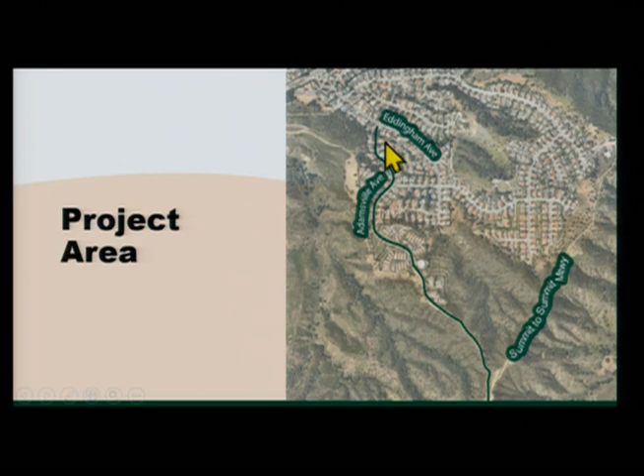It starts in a residential area and then it ends in a fairly open space area. The community has voiced some concerns about speeding. In the northbound direction, there is a decline, so people tend to speed. It is downhill as you come here and then extends into this community, so there's concerns about speeding.

A couple different facts about this area and the existing conditions - Tatiana had mentioned some of them. It's a two-way winding road with on-street parking, a 25 miles per hour speed limit, and it primarily runs through a residential area. There's a steep grade, and the area experiences downhill speeding.

So we looked at several different options and wanted to get your thoughts about these different options. We'll provide some recommendations and what we think towards the end, but we considered several different options and some of the considerations that come with those options.

The first thing that we looked at are speed legends. A couple different things with speed legends to think about: they're painted numerals on the roadway, they indicate legal speed limits, they catch drivers' attention, and then they influence reduction in vehicle speeds. One other thing that's helpful with these is in areas where there might be limited visibility - where you can't see a sign, you're coming around a curve, or maybe you have vegetation - they can also help reinforce the speed limit.

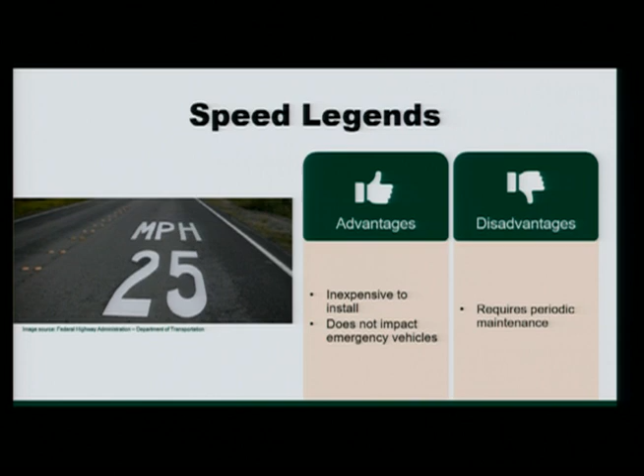Now, we wanted to consider some of the advantages and disadvantages of each of the options that we looked at. Some advantages of speed legends: they're inexpensive to install, and they do not impact emergency vehicles, which we know is very important in this area. Disadvantages: they do require periodic maintenance, so there will be some maintenance involved. I should also mention that all these different options we looked at are relatively low-cost treatments, so we're looking at something that we can fairly easily implement - you'll see that with all of these different options.

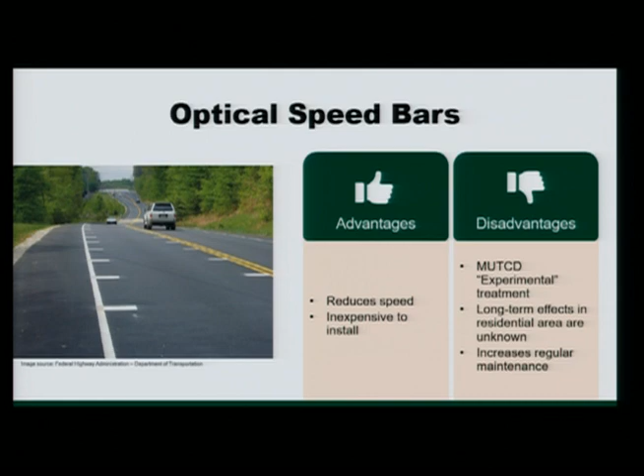The second option is optical speed bars. These are effective on curved roads - they're painted stripes across the roadway, spaced at gradually decreasing distances to give a perception of speed, causing the driver to slow down. Some advantages: they reduce speeds and are inexpensive to install. Some disadvantages: they're considered experimental treatments with the MUTCD, the long-term effects in residential areas are unknown, and this does increase regular maintenance needed.

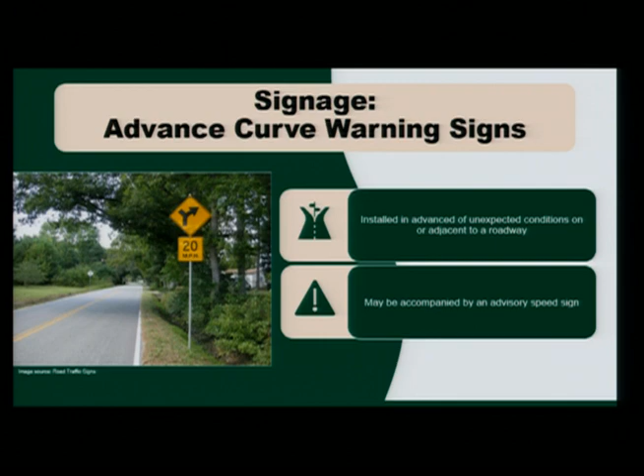The other signage we looked at are advanced curve warning signs. These are installed in advance of unexpected conditions on a roadway, and they may be accompanied by an advisory speed sign. The advantages are that they provide advanced warning of unexpected or sharp curves, and it is a visual warning. Once again, the disadvantage would be that it may cause confusion or sign pollution, but with these you typically don't have to place as many as the one we showed previously.

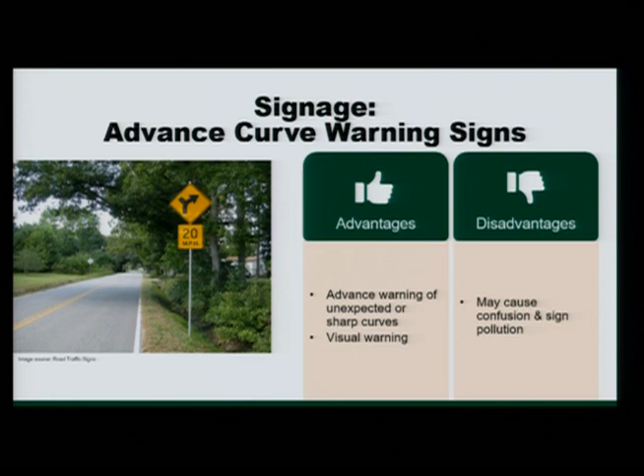So based on what we looked at, some initial recommendations to help speeding in this area would include - and this is what we recommend - speed legends to reinforce the speed limit, advanced curve warning signs to complement that, and some additional strategies that we considered that could help support these would be mobile speed feedback signs to get data on how effective these treatments are, and also enforcement of the area.

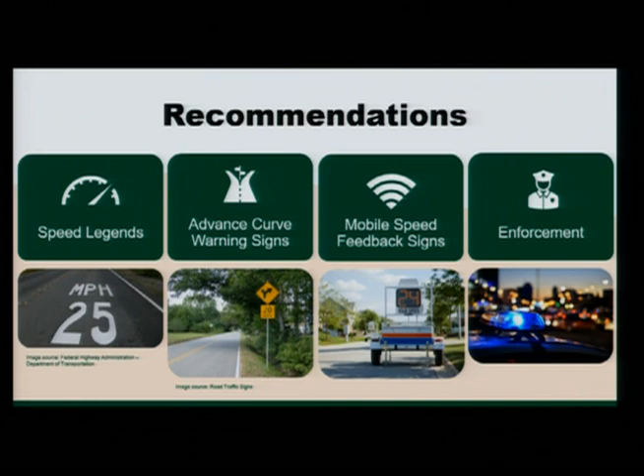And then just some initial locations - I think this is pretty conceptual at this point, but to give you an idea, we could place the curve warning signs in advance of the curve, and then we would also paint the numerals. This could be done in both directions, but based on the way things are geometrically, or the slope of the area, we would really want to focus on the northbound direction over the southbound direction.

And that's all, thank you so much.

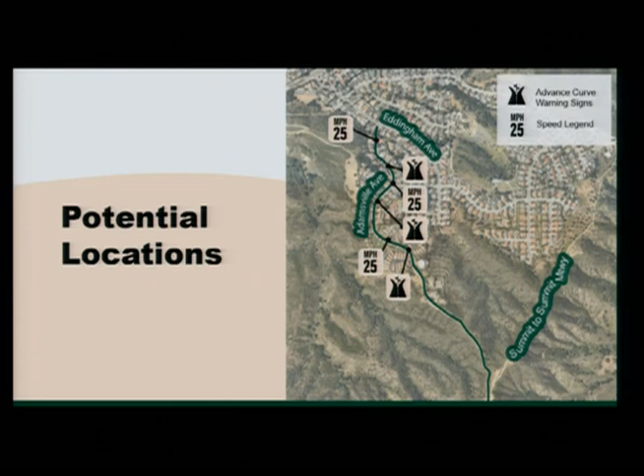Wonderful, thank you, Maya. Let me ask you a question - I think this is more for you, Philip, or the team. But what are we using currently within the city that's more consistent? Is it speed legends and the curvature sign that you mentioned?

Well, I did notice a speed legend leading up to City Hall and a speed feedback sign. I think those are consistent. But let me let the city weigh in.

You're absolutely correct, Maya. We do use speed legends where we notice it might be visible and helpful for drivers to pay attention to the speed limits. In more rural areas, we do use curvature signs with advanced warning signs. We don't use too many chevron signs in the city, but we think that's the additional option that would come after the recommended measures.

Okay, got it, thank you Tatiana. Question - I'm just curious, are there studies that indicate what seems to be most effective in these situations? Because this is a problem not just on Adamsville, it's really bad there because it's a steep hill, but all over the city. I've lived near Parview Drive, where if you're out there after 10 o'clock at night taking a walk, people are just blowing through the stop signs and everything. I'm curious, in your research, does anything show what seems to be most effective in curbing people's bad behavior?

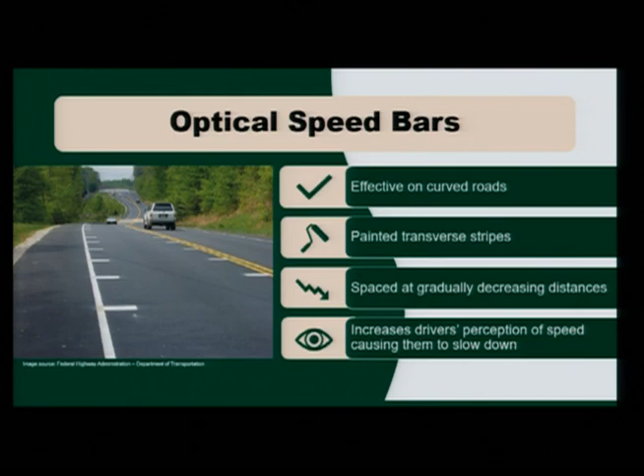The second option you mentioned was the speed bar or something. If I'm not mistaken, you went through that so fast and I don't have a printed copy. So the ones you install on the ground on the side of the roads that go down, what are those called? Optical speed bars. At least this is something physical. When people come down, if they're going too fast, they will notice that and slow down.

That would be my thoughts to share. Thank you. Thank you.

We usually rotate the sign throughout the city. We can leave it in one location for about two weeks, because after that it's not effective anymore. People get used to it, so the strategy is we install it on the same street but in a different location, and bring it back in a few months.

Understood. And we're not talking about a fixed sign, we're talking about a mobile sign, right? Correct. Which you highlighted, right, Maya? Okay good, I got it.

Wonderful. So our call to action then, Tatiana, on this particular agenda item is: what are we looking to achieve with this? Is this something we want to take to council and approach them with, or is this something we'll vote on internally and then move forward on?

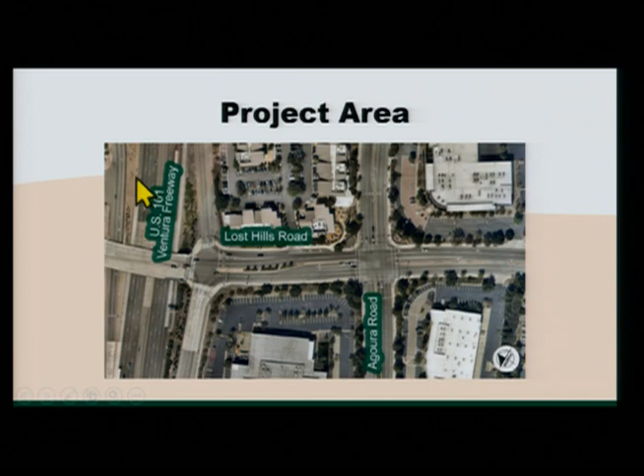Sure, thank you so much, Tatiana, for that great overview. So this is the current conditions of the roadway. Right here is one of the areas she mentioned, and then right in here is another critical intersection. When we're looking at Lost Hills and Agoura Road right now, this is currently a through right turn. I'm going to talk about how we can restripe this corridor to better accommodate the movements.

There is a lot of congestion in this area caused by the nearby freeway, and we think there are a couple different options to improve the conditions here. A few facts about this area: the 101 is quite close to this intersection, creating a lot of congestion, with heavy morning southbound movements and heavy evening northbound movements at Lost Hills and Agoura Road.

There are existing Class 2 bike lanes on Agoura Road and Malibu Hills Road, the west and east directions. It's also important to note that within the city's bicycle master plan, there are future Class 2 bike lanes identified on Lost Hills Road from the US 101 ramps all the way down to Mulholland Highway, where Lost Hills eventually turns into Las Virgenes.

So we came up with a couple different concepts. It's really important to note that while this may look like a design plan, and it is somewhat of a design plan, it is very conceptual—not a construction plan by any means. We wanted to create conceptual plans to get your feedback and see if that's something we want to move forward with.

We have two different options. The first is Concept A. It's important to note the two concepts are exactly the same here, but we changed it slightly here. The black box will remain the same between the two concepts, but you'll see some slight deviations, which I'll highlight in the green box here.

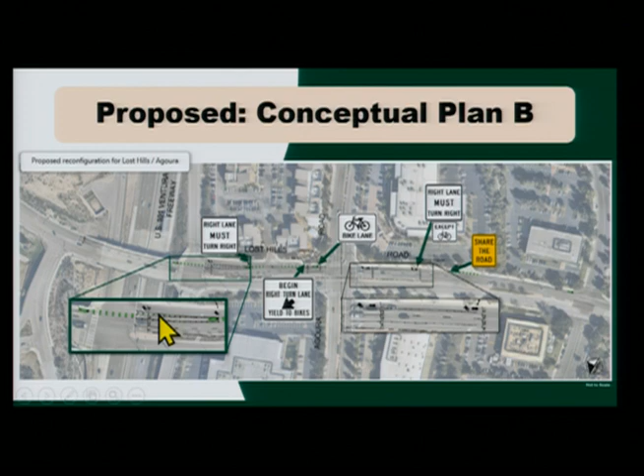At this point, in Concept B, there is a corrected offset, which you can see is a straighter line across the intersection for the cyclist. But this creates a more narrow buffer between the through traffic and the bikes going straight through. The buffer is more emphasized between the right turn pocket and the bike lane. What's important to note is typically when we create a bike lane, we want more of a buffer zone between the through traffic, because typically, yes, go ahead.

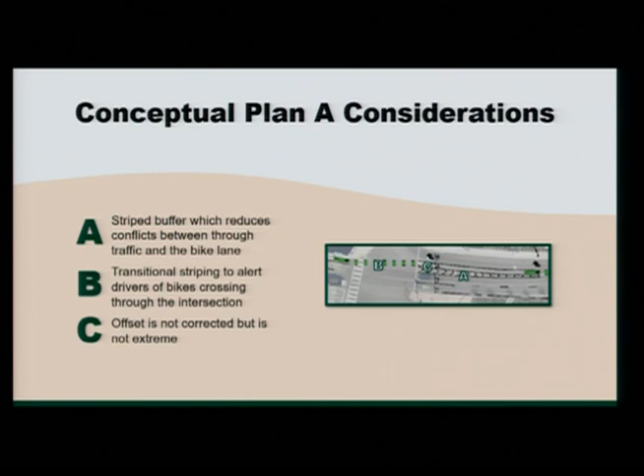You have a question? I'm confused, we're looking at Lost Hills Road, correct? Yes, this is Lost Hills right here. So I guess what I'm confused about is you're referring to it as an east and west segment, shouldn't it be north and south? This is north and south, sorry. Right, yes, but on your next slide, go forward one, it says corrected offset from... oh, I'm sorry, east. It should be north and south. Yes, it should. Okay. And the same thing, let's see. Oh, just there, yeah. So thank you for pointing that out.

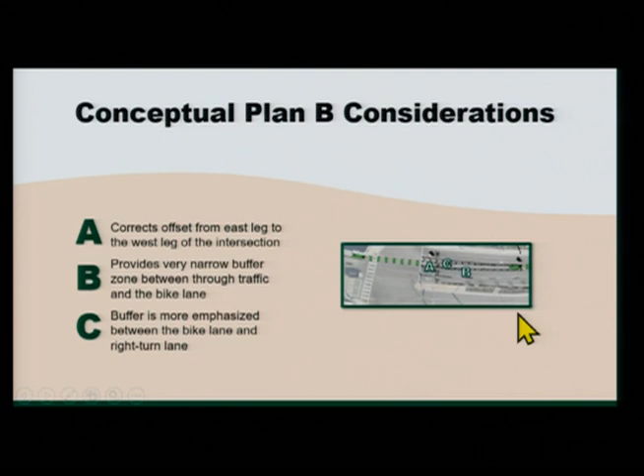So one other thing is the buffer is more emphasized between the bike lane and the right turn pocket, but when looking at bike striping, we want to create a larger buffer between the through traffic, because typically they are moving faster than someone making a right turn.

With this in mind, we believe Concept A is a better option because it creates that larger buffer zone. You still get the benefits of providing facilities for bicycle connectivity, consistent with the bicycle master plan. You create a large buffer zone between the through traffic and cyclists, and include the transitional striping across the intersection to make drivers aware of cyclist presence. The last part, which I think is one of the most important, is it maintains the intent of the improvement project to create a dedicated right turn lane and keep that through lane so we can alleviate congestion in this area.

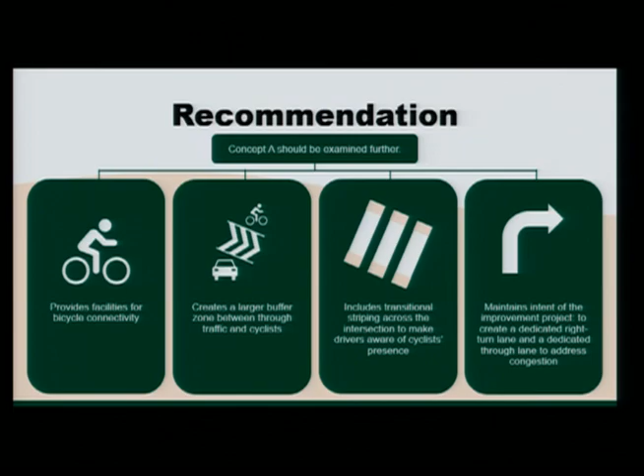That's great, thank you, Maya. Appreciate that. Let me ask you a quick question.

We all know that area is our commercial office area, right? We have a tremendous amount of tenants, Cheesecake Factory over there, a lot of employees, and that's a very heavy pedestrian area. So when they're crossing the street to go over to the food courts or Erewhon or the Summit, wherever they're going, thank you. So right now, if we go with something like this, is that going to solve the pedestrian issue? How do we kind of... or are we still going to have the same problem with traffic congestion in that right-hand turn lane?

No, the pedestrian movements will stay as they are right now. I understand what you're talking about if we allow right turn on red, but that's a very standard intersection with a pedestrian crosswalk and allowed right turn on red. Vehicle drivers need to yield to pedestrians at the intersection, so there still will be that. We'll have to look at the signal timing once we implement the change, because there were certain changes made after the interchange was constructed and that lane eliminated. So that will happen as well. We'll look at the timing to make sure pedestrians have enough time to cross the street. We will have additional signs installed for the pedestrian crosswalk, so the safety of the pedestrian will be taken into consideration.

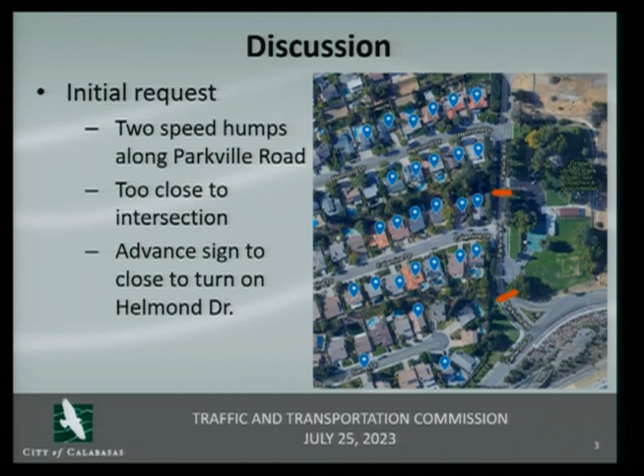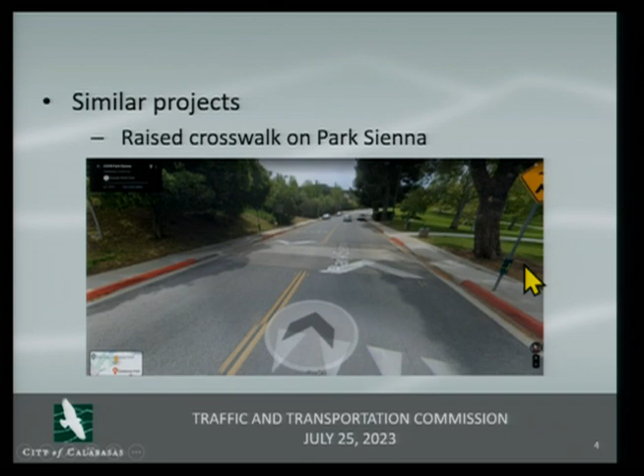So we decided to go with the raised crosswalk, and here's one example on Park Sienna - this is an older picture, but right now it's striped and has the continental striping on top of it, and people are quite satisfied using it.

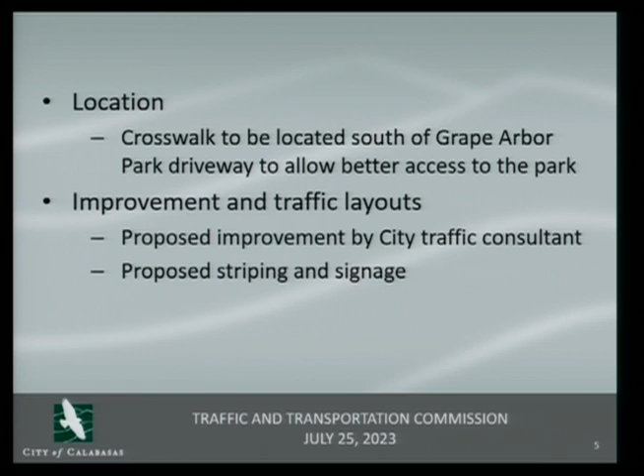As for the location of the crosswalk, we thought it would be more practical to the neighborhood if it was installed right before the driveway, and it would allow for more people to use it. This is a preliminary design and the layout.

So we would have 12 foot ramps to adjust for the height difference, creating an easier, softer approach to the raised crosswalk so it doesn't create too much vertical movement for the cars, but at the same time it brings up their attention to the crosswalk.

And we would have a 10 foot crosswalk zone where people can cross, and we have two options so far. We can go with ADA compliant curb ramps on each side that would connect to the existing sidewalk, but that would obviously cost more.

Our second option would be to just connect the sidewalk using another concrete panel, creating a through path from each sidewalk to the other. In that case, we would just need to allow for the flow of water on the gutters, so we would use culverts to let the water flow.

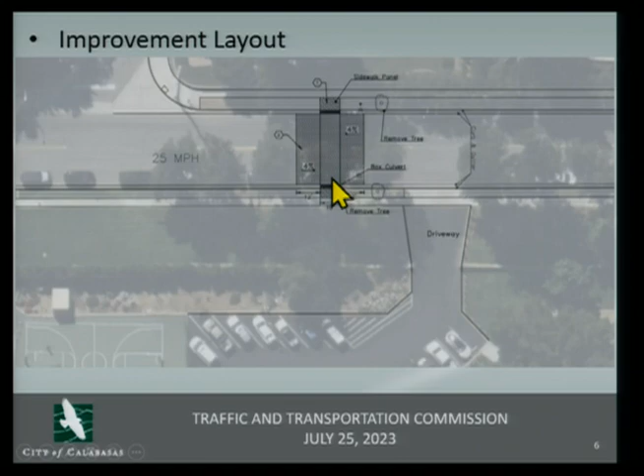So for someone who, hypothetically, is speeding and then all of a sudden gets to the beginning of that 12 feet and hits the brakes, is it long enough to stop before hitting someone who's crossing? Because that's the whole point, right? Maybe we need to put a speed hump before that to warn them, to slow down a little, or maybe grooved pavement to wake them up, to pay more attention.

The second thing to consider is that we have the same sort of situation on Park Sienna, as I showed in the example, and it's working really well. Based on past experience and having all these proper signages based on the standards, I think it would be enough to let the drivers know and be aware of the upcoming raised crosswalk.

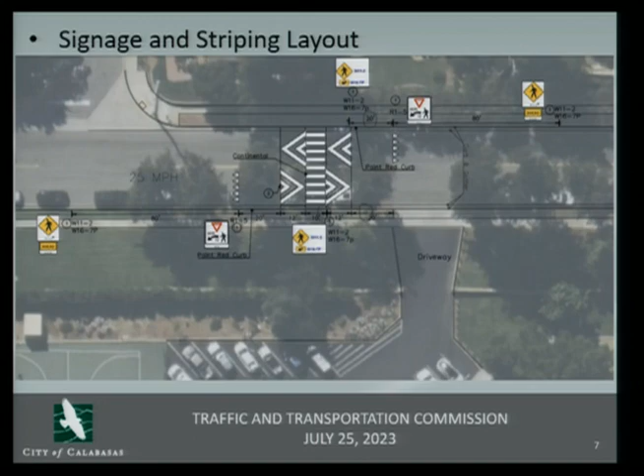So I actually do have a question regarding the ADA versus the concrete panel with the pathway. I'm under the impression that we might want to look into the ADA side first before we invest. Even though it's going to cost more, I think it's the appropriate step and measure to take to look into it and see where we are with that.

If you have the panel, it comes across at grade with the sidewalk. So theoretically, if you're in a wheelchair, it's already level at point of entry—you'd go across and go right onto the sidewalk. Understood. And then you'd have culverts for water to flow underneath. That's perfect, okay, that's great.

So we looked at the different heights of the raised crosswalk, and that's what Sohail referred to—create the ADA ramp and create the raised crosswalk 4 inches high versus 6. And we look at the option with 6 inches, that it will be flush with the sidewalks, and then we don't need additional ramps to make it ADA compliant.

To go even a little bit further with our preliminary design, we already contacted the fire department and asked for their opinion, because that's another consideration we have to be very serious about for emergency vehicles. We have a preliminary letter from them that said if that's the safety concern and that's what the engineers recommend, they don't have any issue with that.

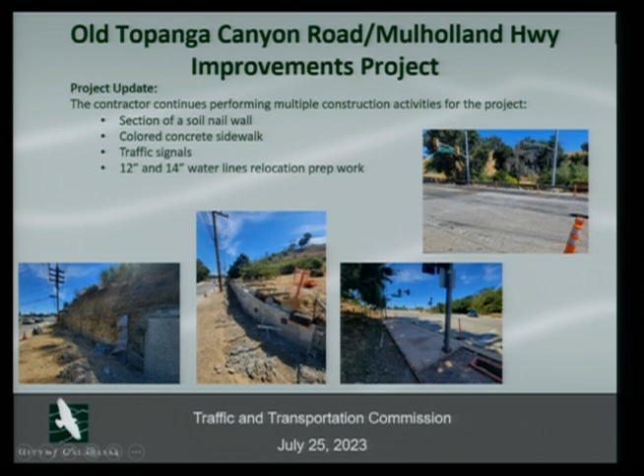It'll be a quick division report with updates for this month, or since we last met. I'd like to give you some updates on the project currently in construction, which I'm sure you're all familiar with. It's the improvements on Old Topanga and Mulholland Highway. Right now, the contractor started working on the soil nail wall, close to the intersection with Old Topanga Canyon East, near Calabasas High School.

Staff and the contractor are currently working with a couple of companies for utilities, including Southern California Edison, since they need to do a couple of relocations. They're relocating anchors so we can finish the sidewalk connection from Wild Walnut Park all the way to the intersection near the high school. We're also working with Las Virgenes Municipal Water District on relocation of the water lines, and that work will be scheduled soon.

We'll have more updates through our media and communications. The water district will give notifications, and the city will work on notifications to make sure it's communicated well to residents that are affected and through the schools.

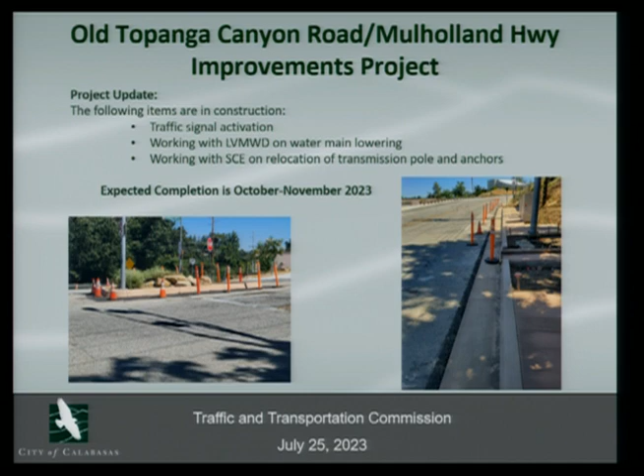The next project currently in construction is actually nearing completion: the 2023 annual street resurfacing project. This year the major location was Park Granada, and we also did a few dig-outs on Parkway Calabasas, Las Virgenes Road, and Calabasas Highlands. The work still needed is installation of traffic loops, scheduled to be completed next week. Striping is also coming up, and project completion is targeted before mid-August.

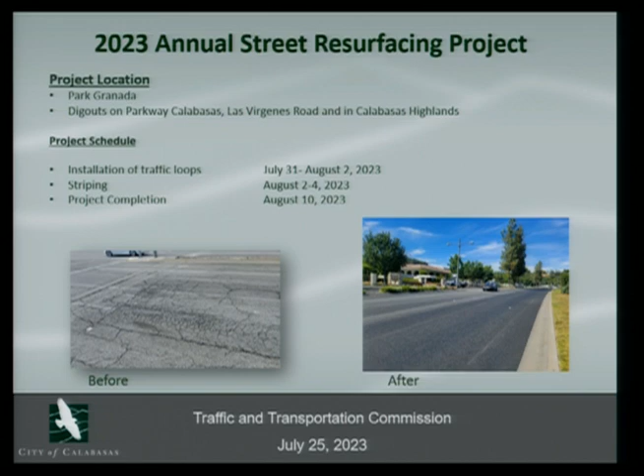The next project, which has not started construction yet, had a contract awarded by the City Council at the June 28th meeting. We already had a pre-construction meeting with the selected contractor. Construction start date is set for September 5th, which is also coming up, and the construction end date is projected to be February 2024.

Just to give you an overview and a reminder of what this project is all about: the location is Las Virgenes Road, north of Mount Calabasas Drive, all the way to the Las Virgenes Road terminus. It will include stormwater treatments—we'll provide bioswales and ditches, a multi-purpose trail, permeable parking areas, and it will improve the cul-de-sac at the north end to standard design.

It will provide several pedestrian crossings from one side of Las Virgenes to the other, so people can access the parking areas and the trail, and it will also continue the sidewalk on the west side. That's basically the area to be improved. The major improvements will be seen on the dirt shoulder on Las Virgenes Road, where currently parking is very chaotic. That will be organized into parking lots and parallel parking along the curb. Of course, one of the major benefits of the project is the stormwater treatment.

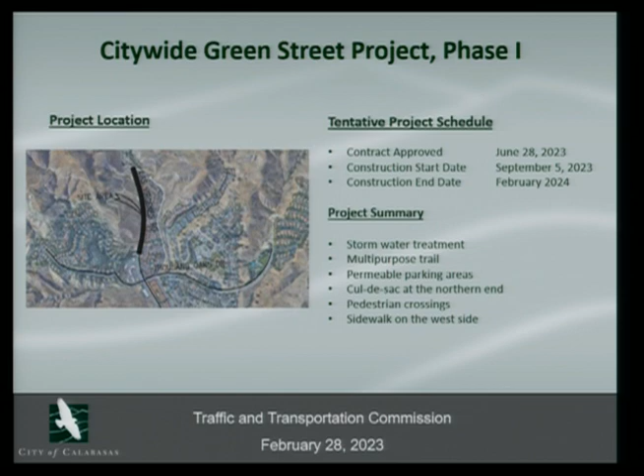I have one question. Park Ora and Old Topanga, when they cross each other, then we run to Park Sienna, if I'm not mistaken. Do you know which section I'm talking about? There is a part of the sidewalk that has been mudslide from when we had rain, and it's still the same condition, left alone. Is that on this list at all?